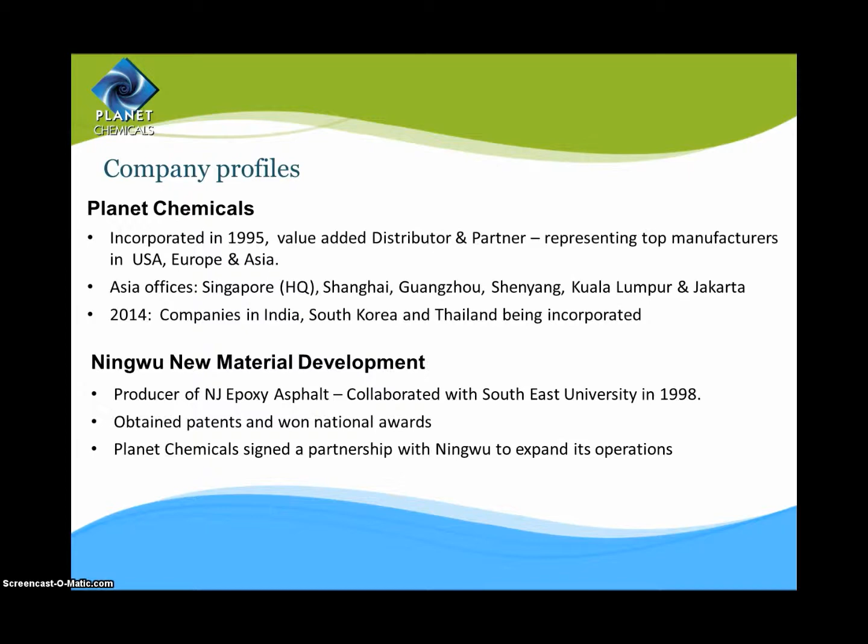Let me now give you a brief overview on epoxy asphalt. It was first developed by Shell Oil Company in the 1950s, during a time of rapid growth in both military and commercial aviation, which led to ever-increasing wheel loads of aircraft, posing structural problems in airfield pavement design. Moreover, with the development of jet-powered aircraft, pavements were required to have good resistance to high temperatures and the erosive effect of jet blasts, as well as resistance to spillages of jet fuel and hydraulic fluid.

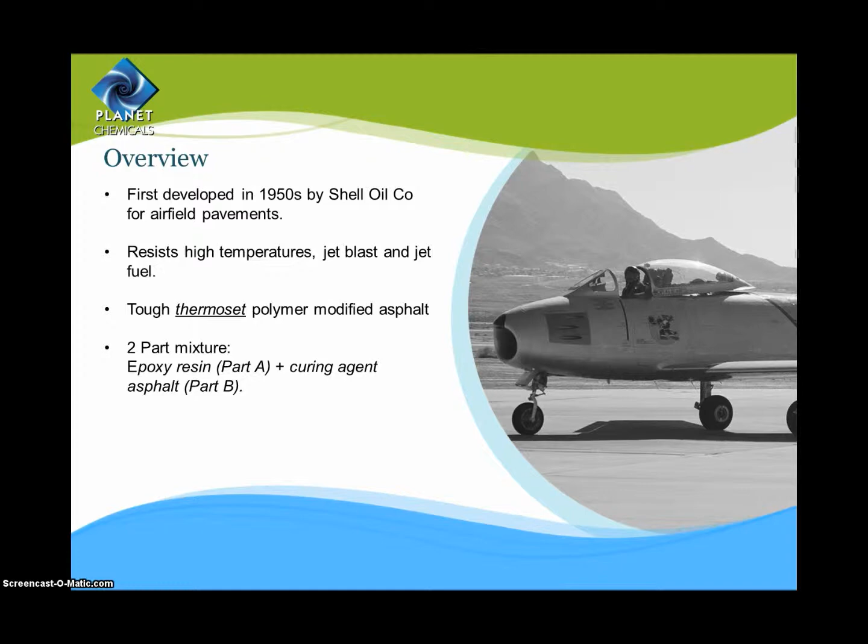So what exactly is epoxy asphalt, and what sets it apart from other pavement binders? Epoxy asphalt is a tough thermoset modified asphalt formed by combining two components: the epoxy resin and the curing agent asphalt. For those not familiar with the terms thermoset and thermoplastic, I will briefly touch on some key distinctions later in this presentation.

Epoxy asphalt comes in a set with two types: the epoxy asphalt bond coat and the epoxy asphalt concrete. A hot spray application of the bond coat precedes the laying of epoxy asphalt concrete to offer optimum bonding strength. At present, there are only two main producers of epoxy asphalt globally: Chemco Systems in the US and Ningwu New Materials, our partner in China.

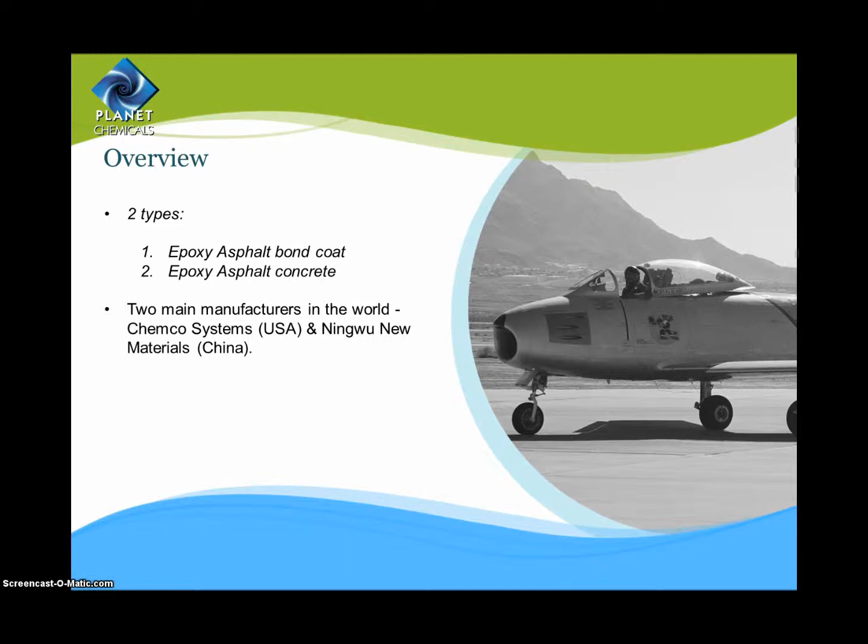In this segment, I will go through some projects that have used epoxy asphalt. This slide lists some of the prominent projects using epoxy asphalt from Chemco Systems. As you may notice, they have been rather active in the US. One of the most prominent projects using their epoxy asphalt is the Golden Gate Bridge.

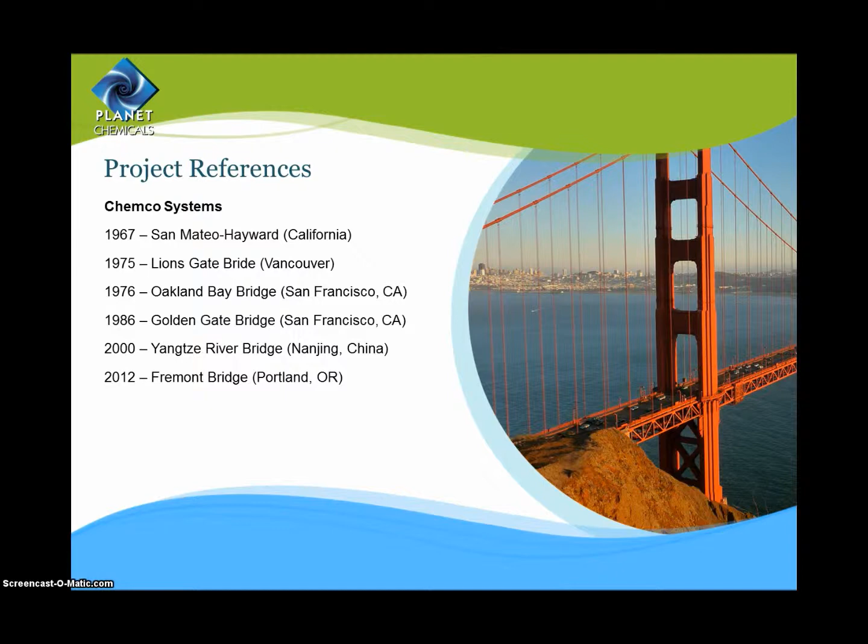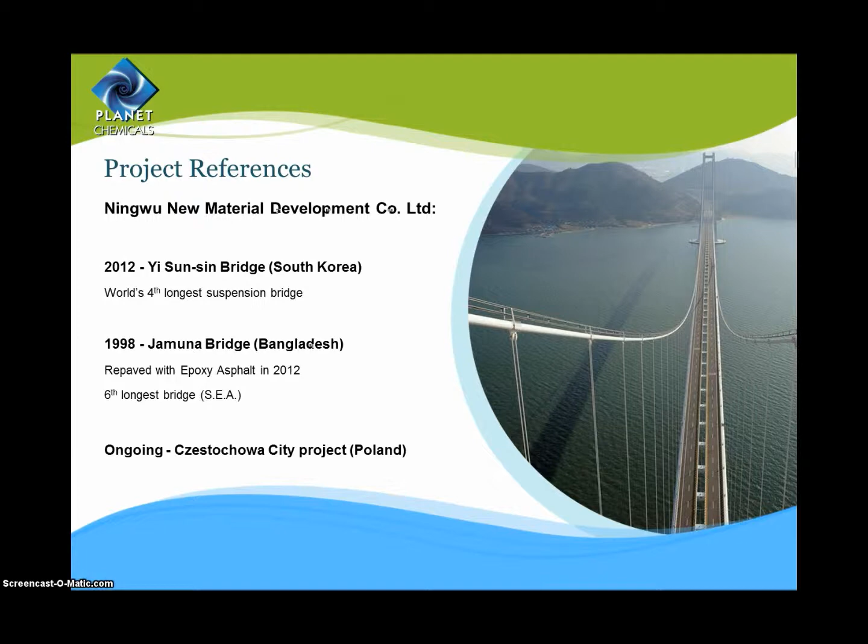One other notable project is the Hangzhou Bay Bridge, a highway bridge spanning 36 kilometers. There are also various projects outside China using NJ epoxy asphalt, including the Yi Sun-sin Bridge in South Korea, shown here on the right, completed in 2012 as the world's fourth longest suspension bridge. The Jamuna Bridge in Bangladesh was originally built in 1998 but resurfaced using NJ epoxy asphalt in 2012. NJ epoxy asphalt is also currently being used in an ongoing city project in Poland.

Now, before I go into the features and benefits of epoxy asphalt, I think it's important to first have a better understanding of the different types of asphalt modifiers.

Modifiers such as EVA, EMA, SBS, and SBR are the most common types of asphalt modifiers used today, and they are classified as thermoplastics. Epoxy asphalt, on the other hand, belongs to a category on its own known as thermosets.

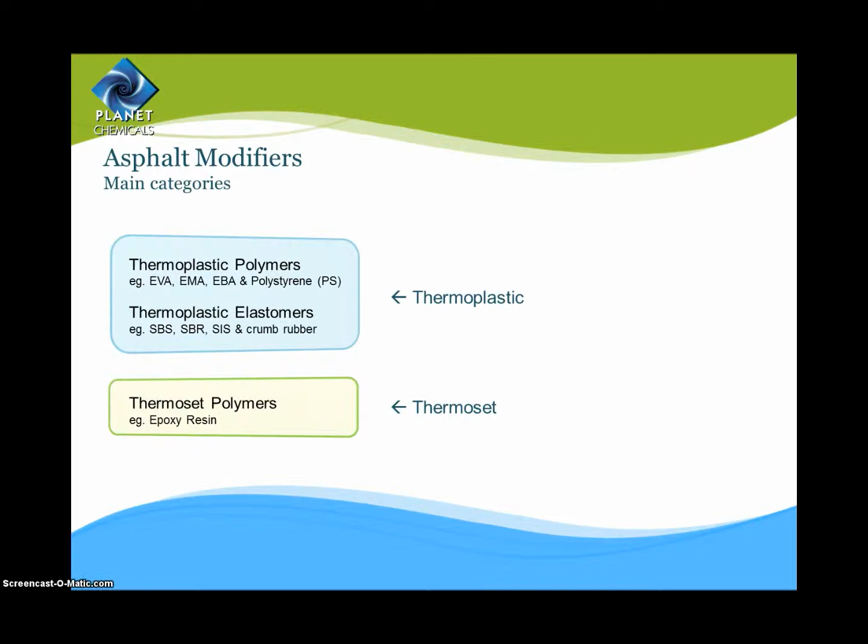So, what essentially are thermoplastics and thermosets? Simply put, thermoplastics have a reversible solidification process in that they soften when heated and solidify when cooled, much like a bar of chocolate.

Due to its reversible solidification properties, thermoplastic modifiers are most commonly used today as they are relatively easy to work with.

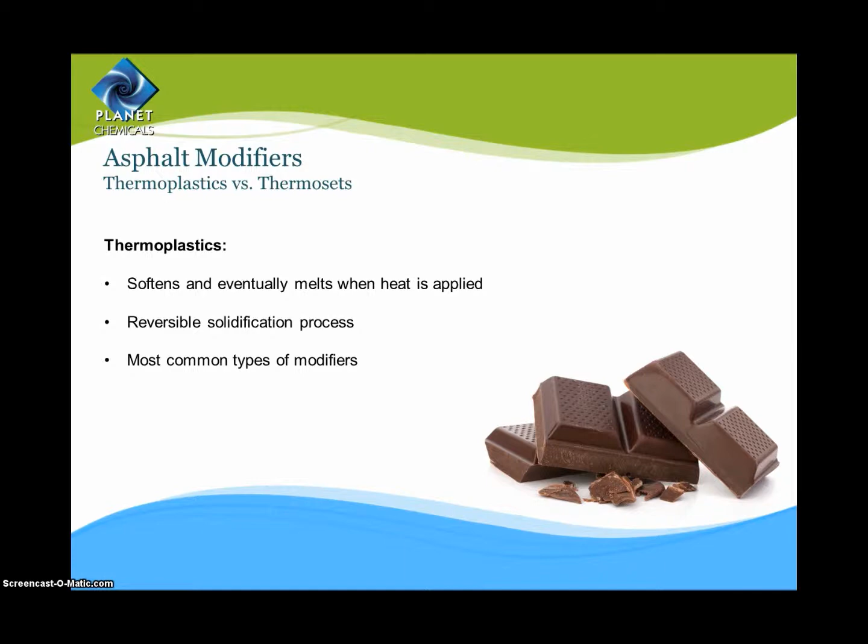Thermosets, on the other hand, can be compared to a boiled egg in that they have an irreversible solidification process. As soon as the cross-linking of a thermoset has taken place, there is no turning back. They become almost indestructible once they cure and cannot be remelted.

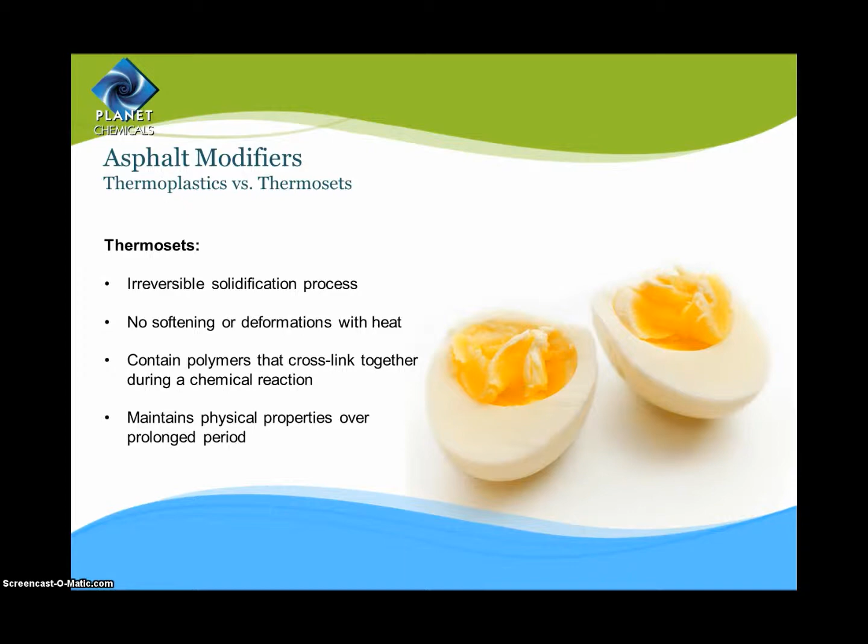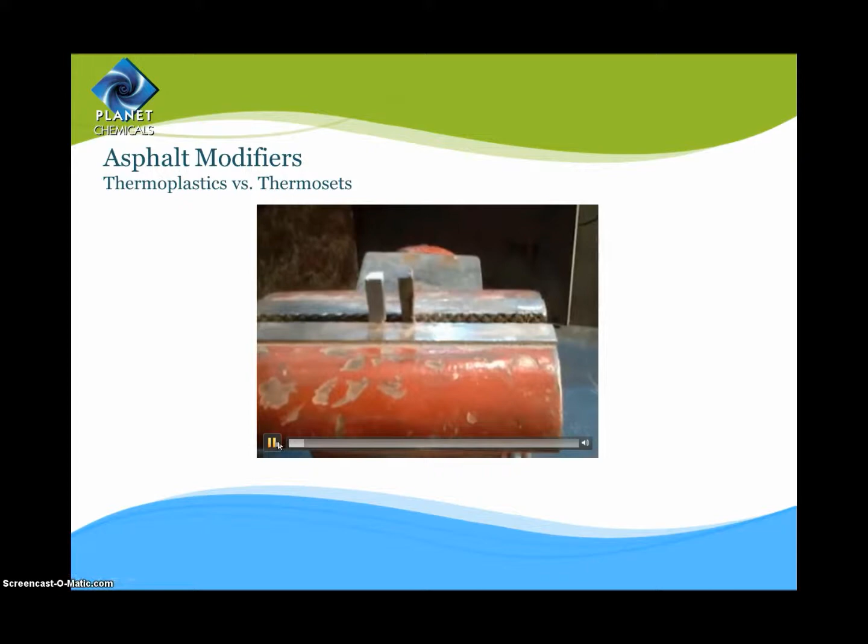This video illustrates how differently thermoplastics and thermosets react when extreme heat is applied. The specimen on the left is a thermoset, whereas the one on the right is a thermoplastic. As you will observe, the thermoplastic specimen starts to soften and deform almost instantly, whereas the thermoset specimen remains unchanged.

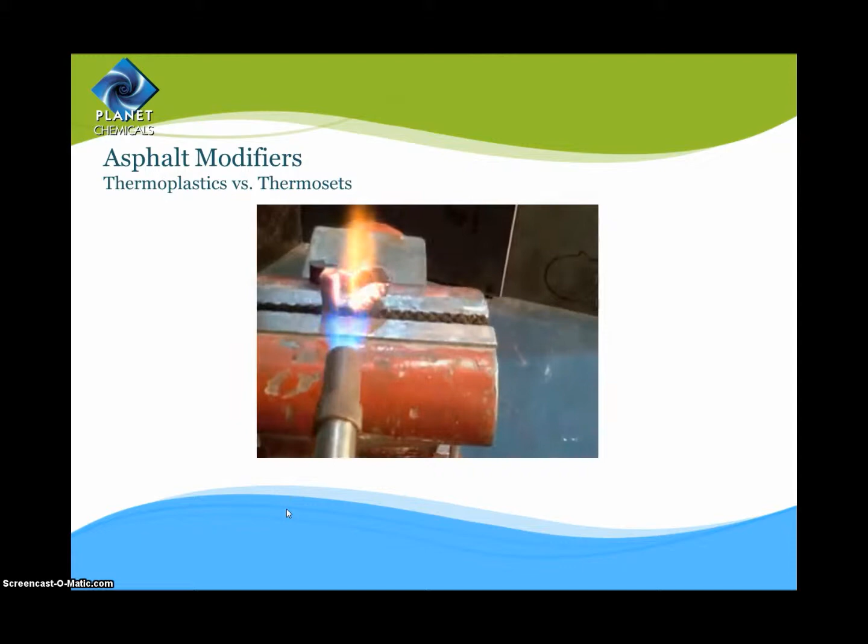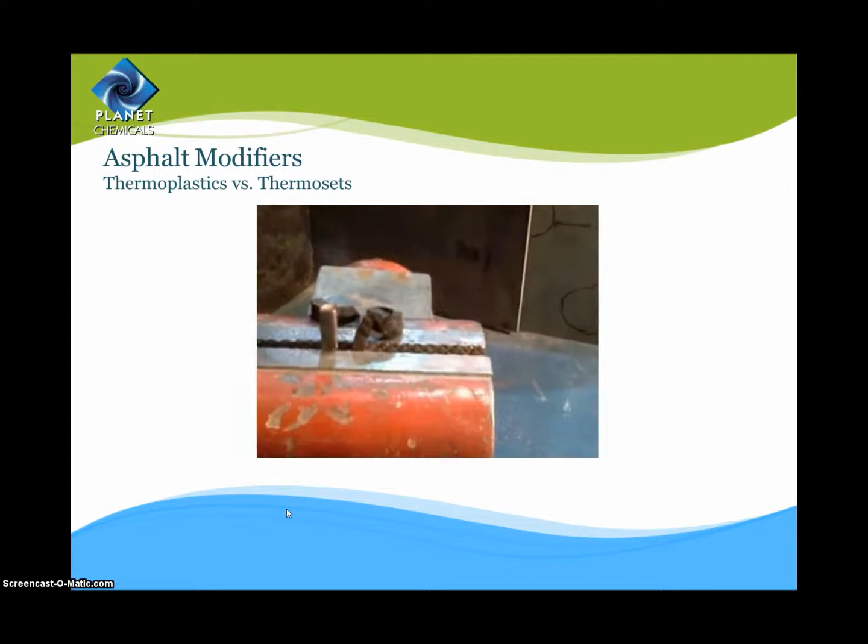Let's now move on to the features and benefits of epoxy asphalt. The thermosetting properties of epoxy asphalt offer excellent mechanical and chemical resistance. This carries significant advantages over conventional thermoplastic asphalt, where failures are prevalent at elevated load conditions, extreme temperatures, and oil spillages.

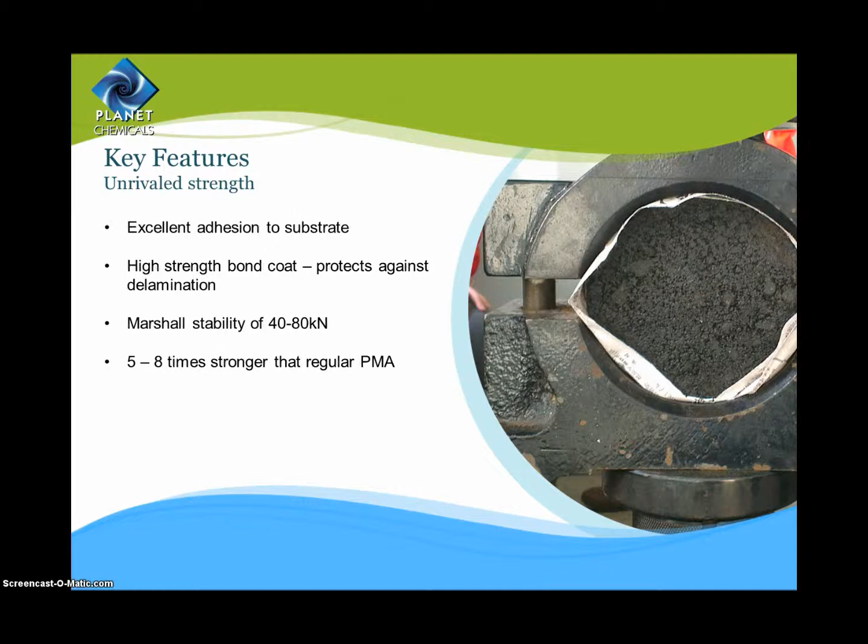Epoxy asphalt forms an excellent adhesion to the substrate and resists delamination even at higher temperatures. Featuring a Marshall stability of 40 to 80 kilonewtons, epoxy asphalt is comparatively 5 to 8 times stronger than regular PMA.

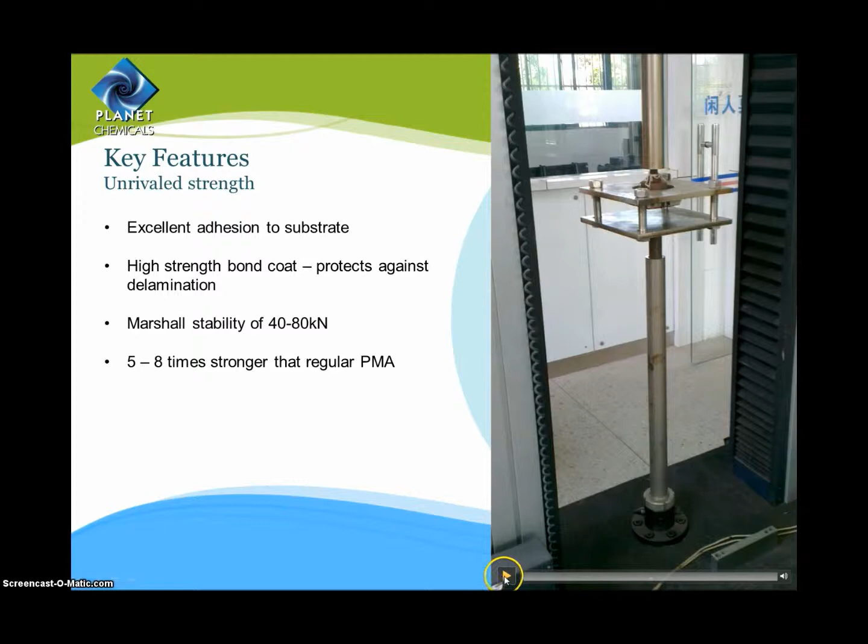The pull-off adhesion test in this video illustrates the adhesion strength of epoxy asphalt. In this test, a circular steel stamp that was glued to a concrete block with a layer of epoxy asphalt bond coat is pulled off to test the adhesion strength of the bond coat.

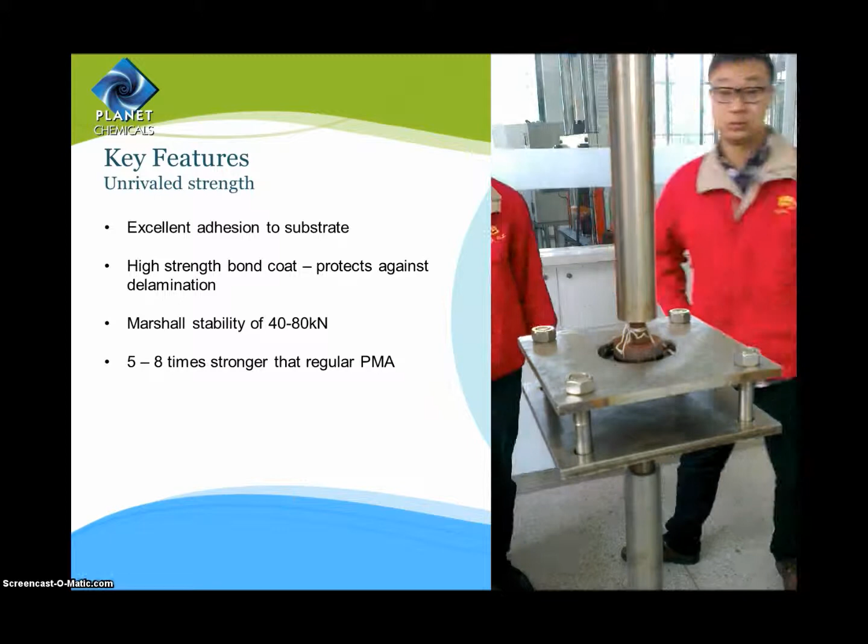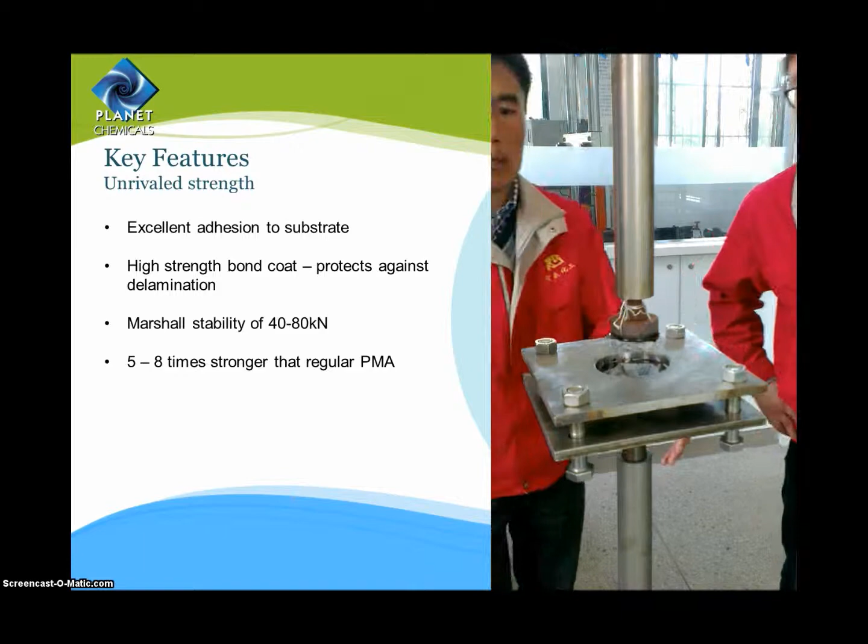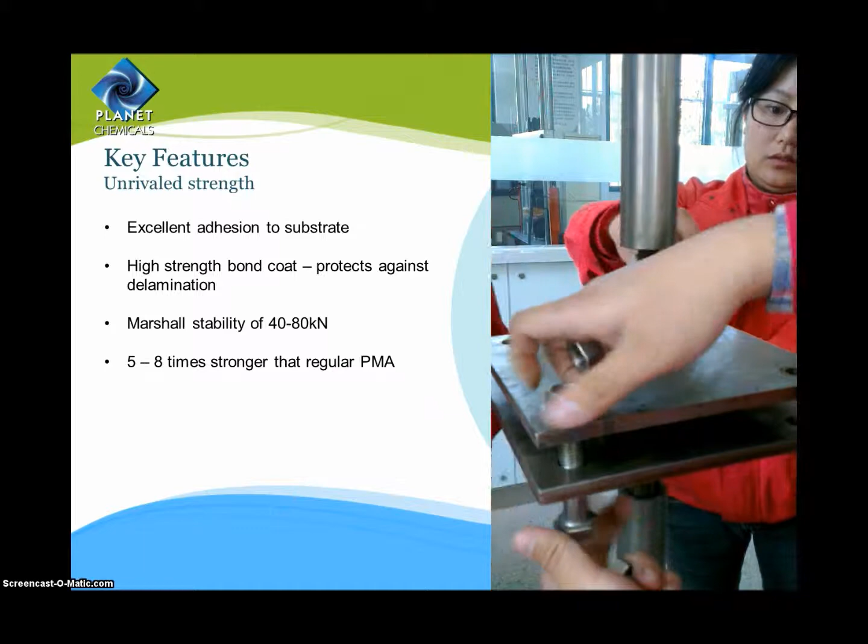As you can see, the point of separation does not occur along the adhesion surface but on the concrete block. The adhesion of the epoxy asphalt bond coat is strong enough to rip out chunks of concrete before giving way. This further substantiates that epoxy asphalt is resistant to delamination.

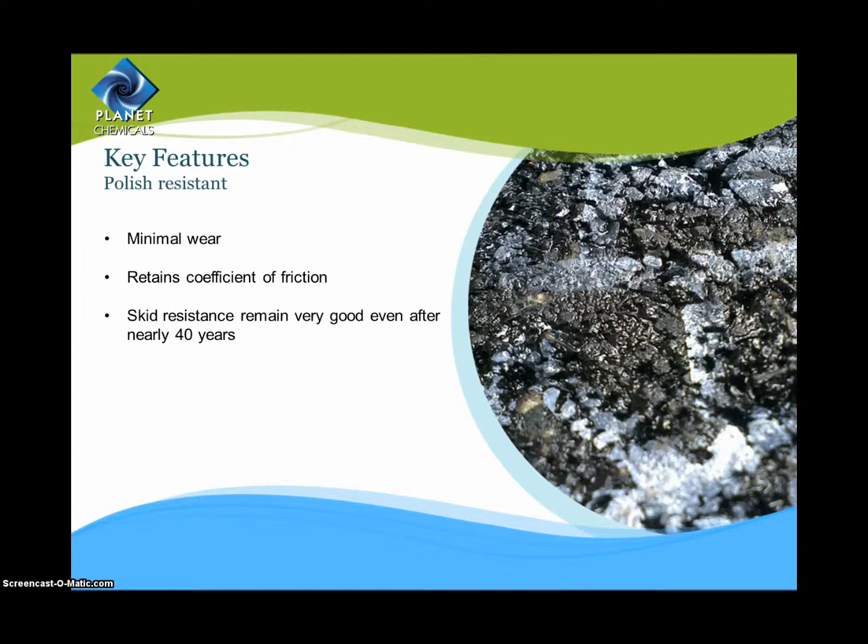As a result of its excellent structural properties, epoxy asphalt pavements are less prone to polishing. As such, the pavement effectively retains its coefficient of friction over a significantly longer time.

Next, with a Young's modulus of 80 megapascals and elongation at break exceeding 180%, epoxy asphalt features a fatigue resistance of 10 to even 30 times that of conventional asphalt.

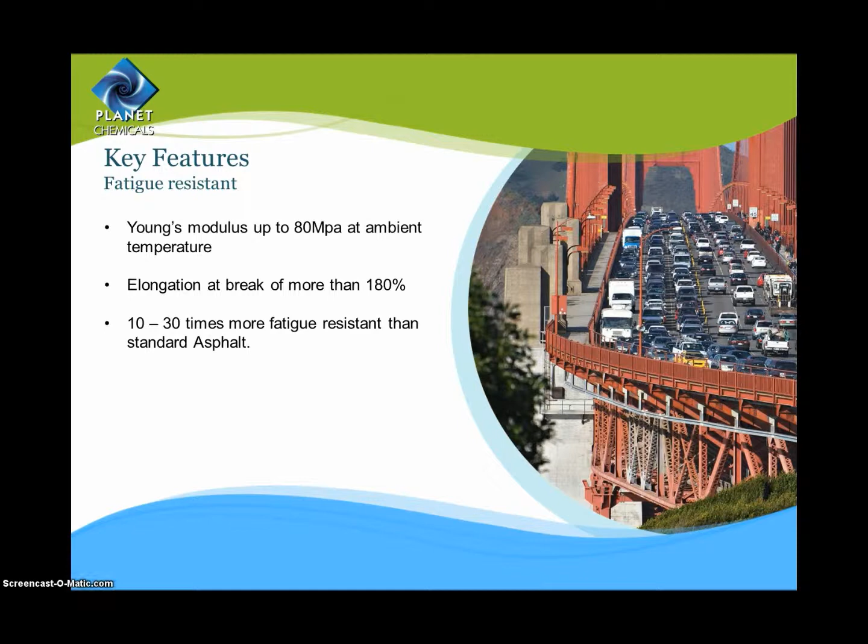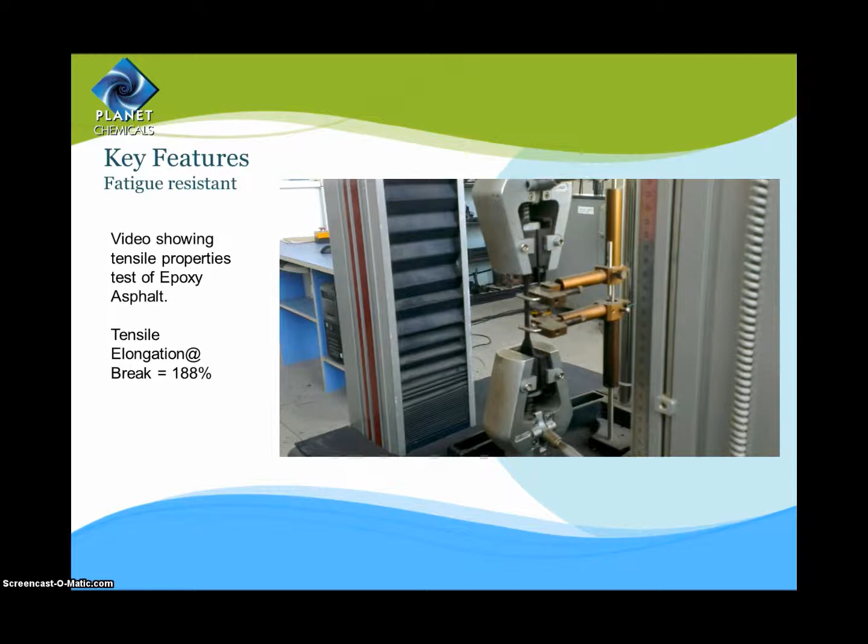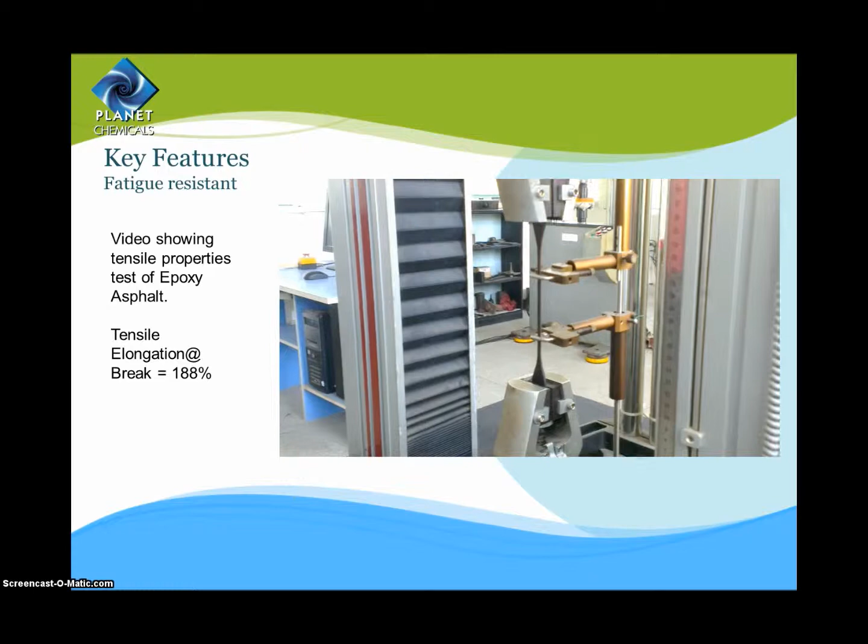The following video illustrates the tensile properties of epoxy asphalt. As shown here in the test data, the resulting elongation at break is measured at 188%.

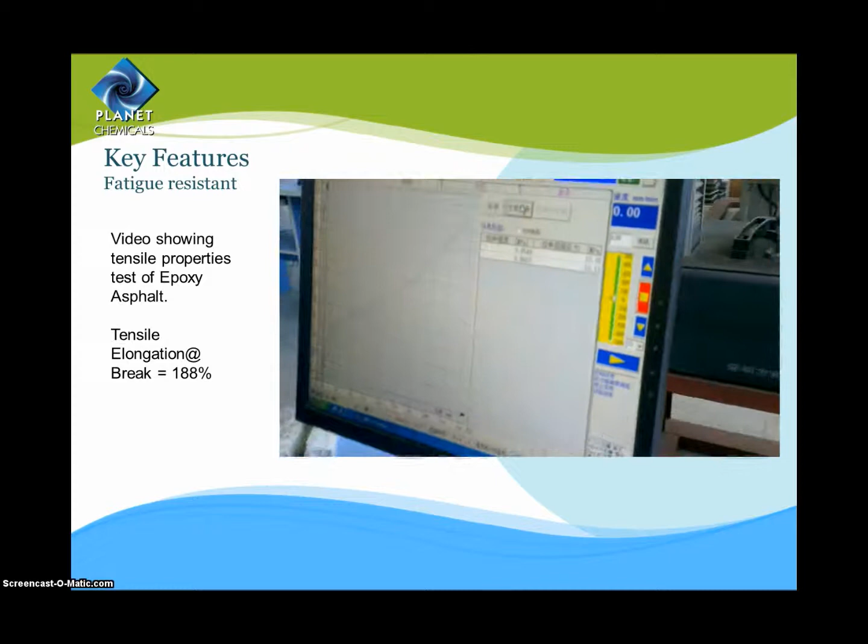This means that the epoxy asphalt specimen can stretch to as long as 1.88 times its original length before giving way.

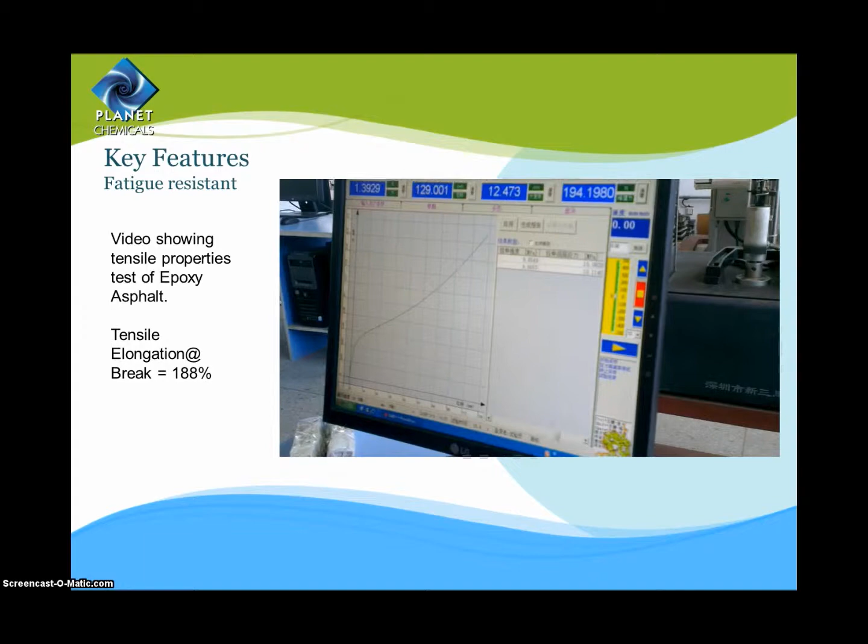Epoxy asphalt resists common failures such as rutting, shoving, and delamination, and has a maintenance-free service life of 30 up to even 40 years. That is more than double that of regular asphalt pavements.

Another key feature that places epoxy asphalt as one of the top binder options for durable pavements is its resistance to chemicals.

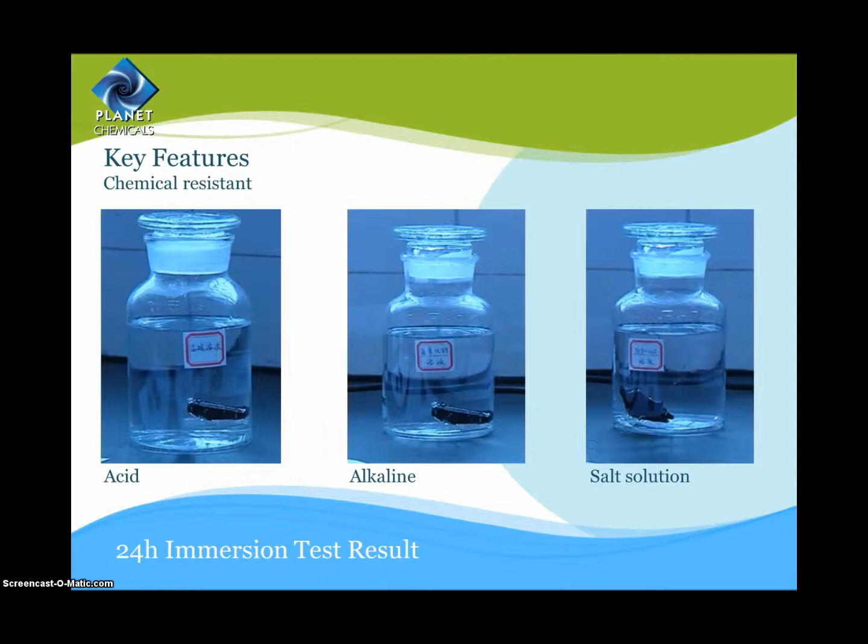Immersion tests were carried out in various solutions: acid, alkaline, salt, and diesel. These tests revealed that even after being immersed for a period of 24 hours, there were no changes to the physical and mechanical properties of the test specimen.

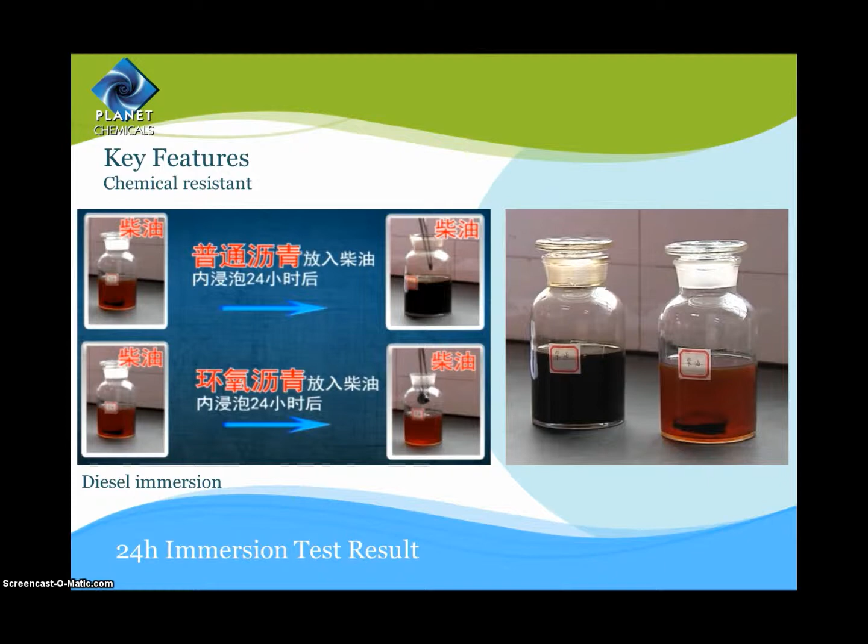It was also noted that even after a 24-hour immersion in diesel, the aggregates from the specimen did not show any signs of loosening. This clearly shows that epoxy asphalt pavements can meet the standard of oil corrosion resistance.

Now that we have gone through some of the key features of epoxy asphalt that clearly show how it contributes toward a pavement's durability, I will now go through a few aspects of epoxy asphalt that show how it can be instrumental to a reduction in total construction costs and serve as a greener, safer pavement option.

First, due to the outstanding structural properties of epoxy asphalt, mechanical stability requirements of a given pavement can be achieved with less construction material.

Studies have shown that strength requirements of a 9 to 11 cm thick conventional asphalt pavement can be achieved with only a 3 to 6 cm epoxy asphalt pavement.

This reduction in pavement material will not only serve to significantly reduce overall construction costs, but also minimize the carbon footprint of projects due to the lesser strain it has on the Earth's natural resources.

Moreover, dead weight can also be brought to a minimum. This is especially advantageous when considering bridge projects.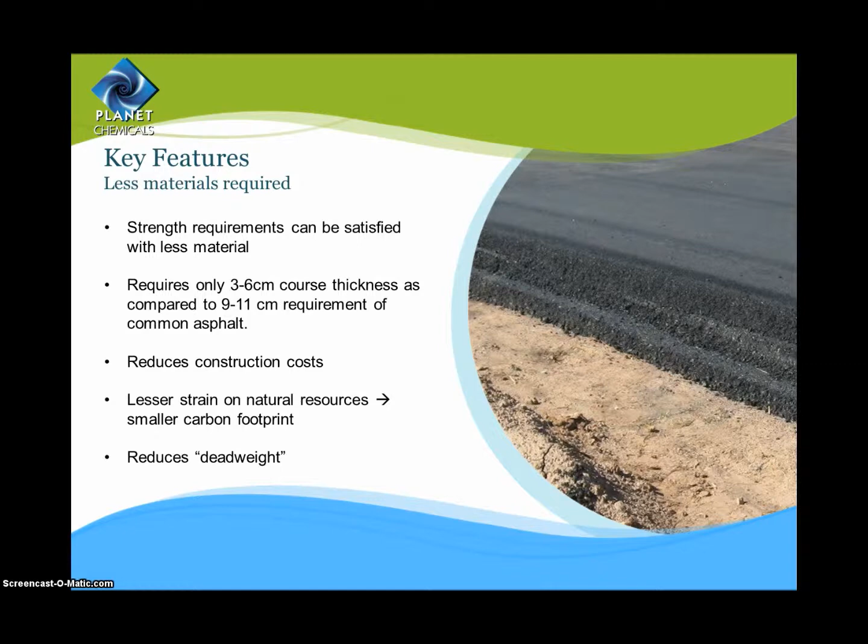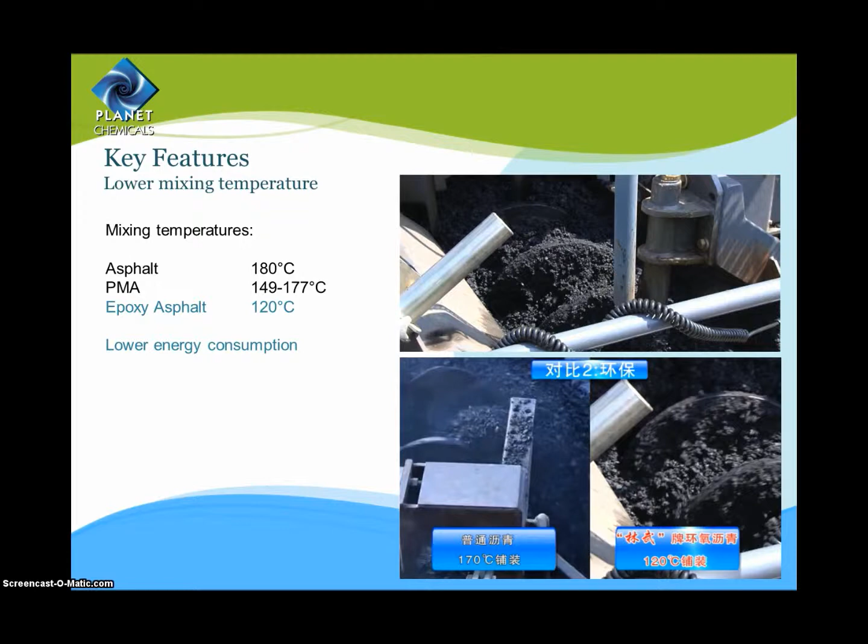Because epoxy asphalt can be mixed at a significantly lower mixing temperature compared to conventional PMA or neat asphalt, the resulting reduction in energy consumption for heating translates to an overall reduction in construction costs. Furthermore, due to the lower mixing temperatures of epoxy asphalt, no harmful VOCs are emitted throughout the construction process.

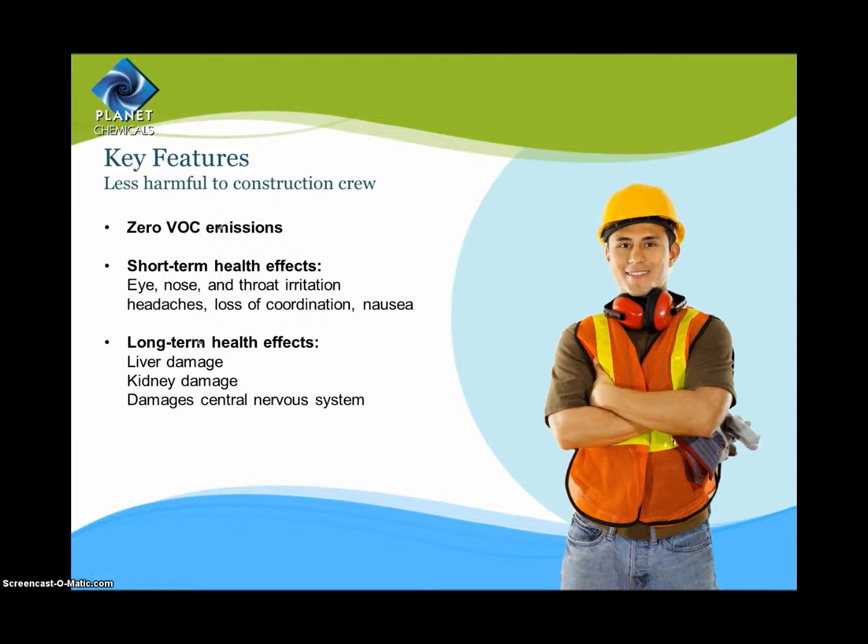Having gone through the features of epoxy asphalt, let's look at some of its associated benefits. The most prominent benefit is a substantial reduction in both initial costs and project life cycle costs. The significantly longer service lifespan of epoxy asphalt pavements, with less frequent maintenance and road closures, contributes to a reduction in life cycle costs. Initial project costs are also lowered with a reduction in raw material consumption and energy consumed.

The use of epoxy asphalt also contributes to non-monetary benefits, such as improving the overall safety and health of the construction crew by providing them a safer work environment free from VOCs. Moreover, the reduced consumption of natural resources also contributes to an overall reduction in carbon footprint.

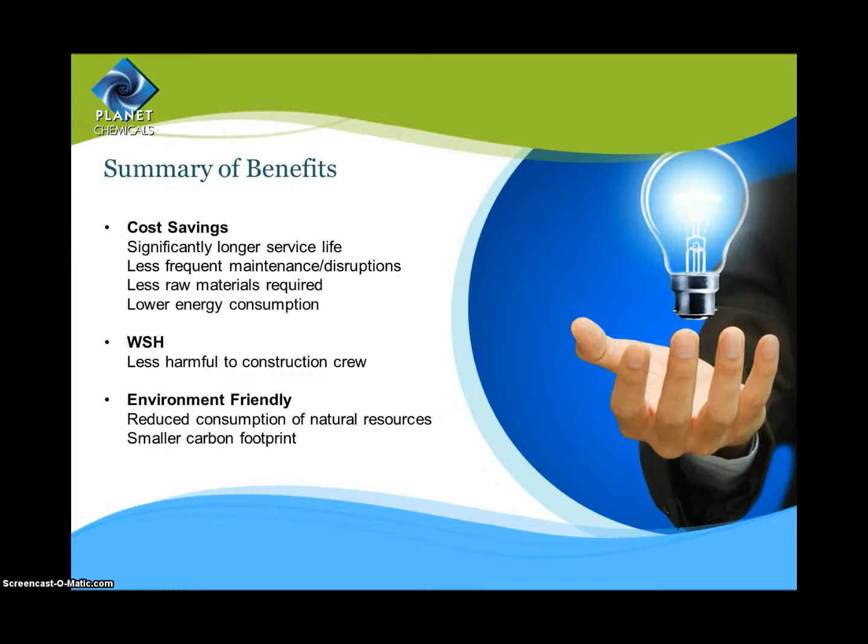To further substantiate what we have discussed so far, I'd like to quote a snippet from a report jointly put together by the OECD and the International Transport Forum, entitled 'Long Life Surfaces for Busy Roads.' This report concludes that epoxy asphalt has demonstrated its ability to deliver long service lives for pavements, attributing this to its superior qualities such as stiffness and insusceptibility to common failures.

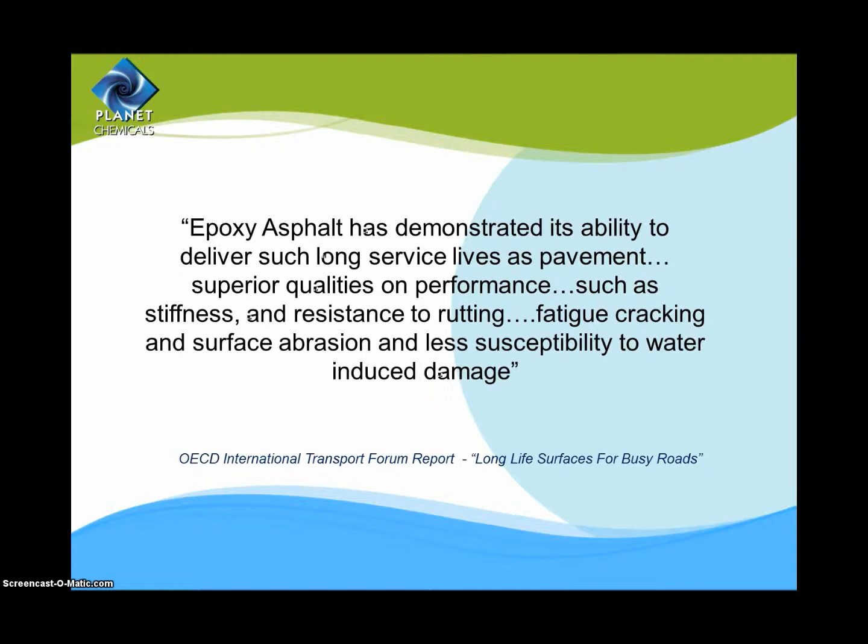Now that we have gone through the features and benefits of epoxy asphalt, I will explain how epoxy asphalt can be used in conventional batching plants with very minimal modification. In this segment, I will also touch on the additional equipment we offer to help streamline the transition of using epoxy asphalt in your batching plant.

The two parts, A and B, are stored in individual storage tanks, where they are each heated to 120 degrees Celsius and pumped into the high-speed epoxy asphalt mixer, where they are mixed according to the specified ratios whilst maintaining their temperature.

The mixture is then pumped into the batch plant mixer, where the epoxy asphalt blend is mixed together with preheated aggregates and loaded onto haul trucks that transport the pavement mix to the construction site. It's important to note that the travelling time of the asphalt mix must not exceed 1 hour, due to its pot life. I will further discuss the issue of pot life in the next segment of this presentation.

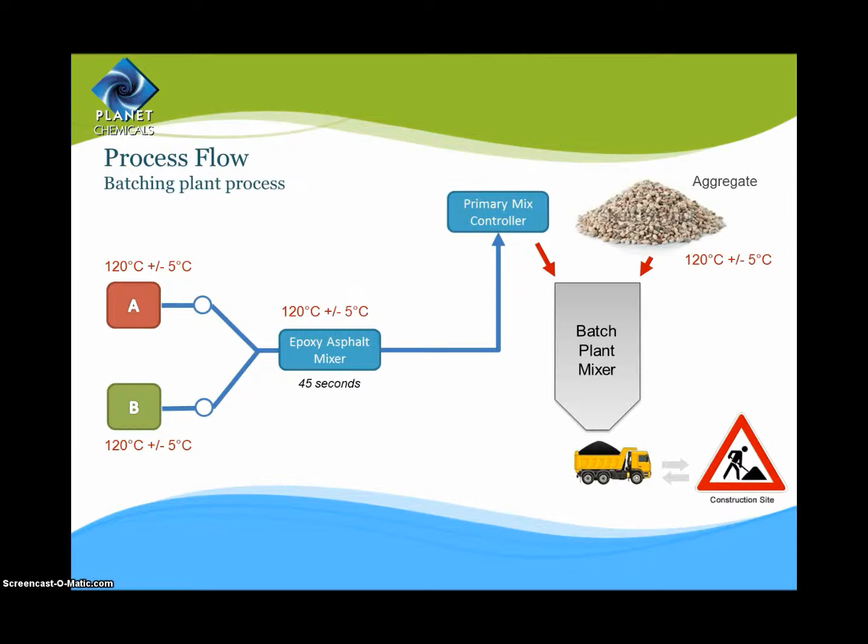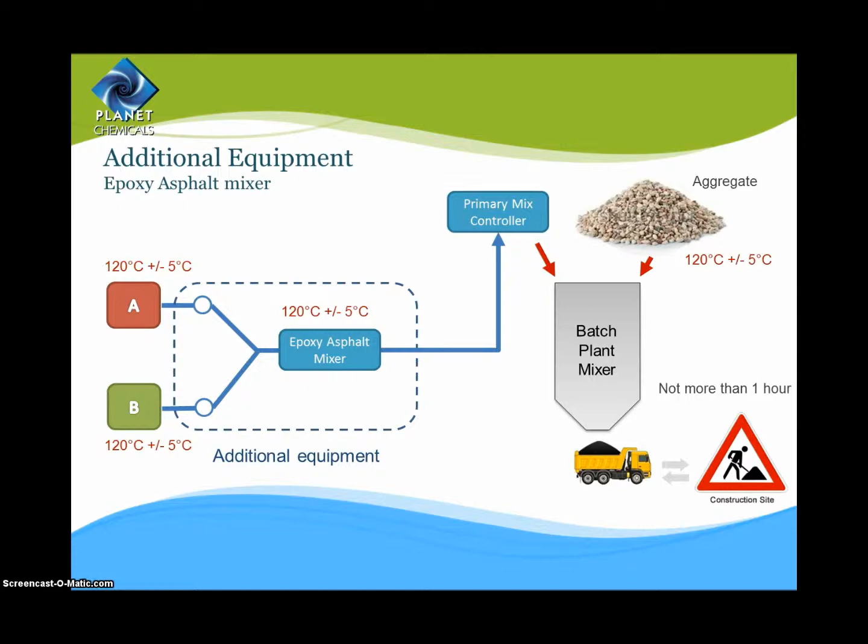There are two main types of equipment that we provide: the high-speed epoxy asphalt mixer and the bond coat spray applicator. The high-speed epoxy asphalt mixer controls the flow of part A and B according to their specific mixing ratios, while ensuring a homogeneous mixture is pumped into the batch plant mixer. The bond coat spray applicator is especially important for large-scale projects as it significantly minimizes the workload, using state-of-the-art technology to ensure an even layer of bond coat is applied to the surface.

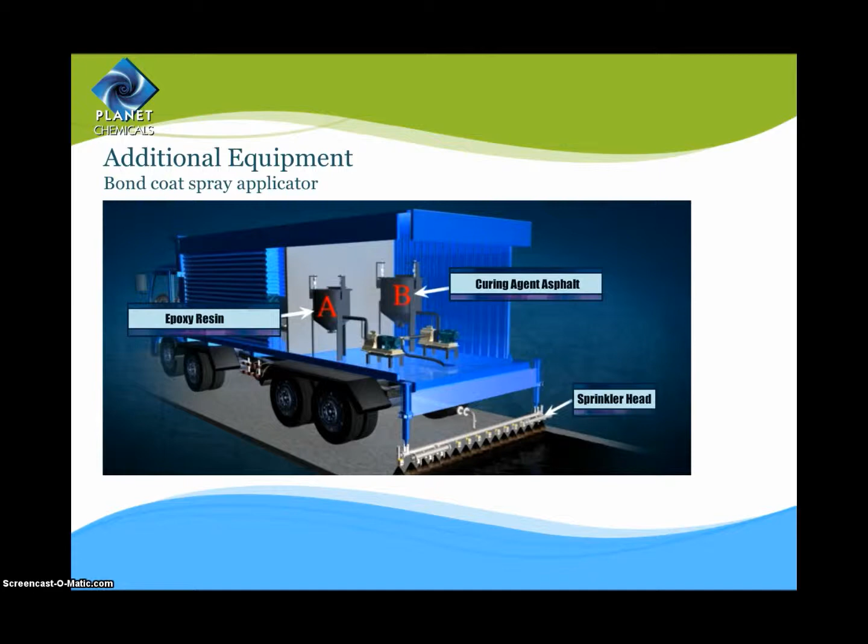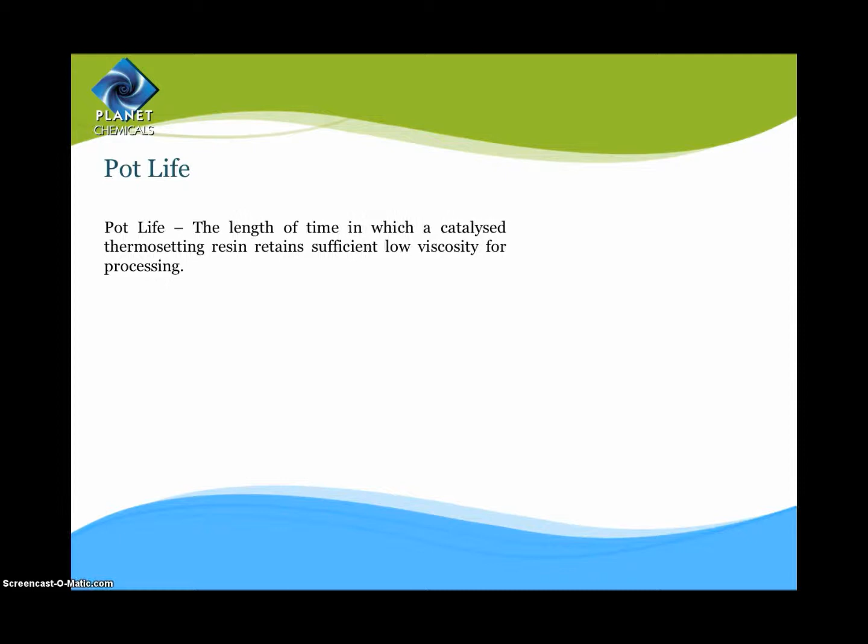Now, this brings us to the topic of pot life. The pot life is defined as the length of time in which a thermosetting resin retains sufficiently low viscosity for processing. As such, the pot life is a very important factor to note, as it essentially lays out the allowable time window allocated for blending, transportation, laying, and compacting of the epoxy asphalt pavement.

The three grades of HLJ epoxy asphalt we offer have different pot lives. HLJ-2910 has an extended pot life of 120 minutes, whereas the other two grades, HLJ-5210 and 8810, have pot lives of 90 minutes. The table shown here entails the pot life and recommended time schedule for each grade. What can be noted here is the difference in time allocated for transportation.

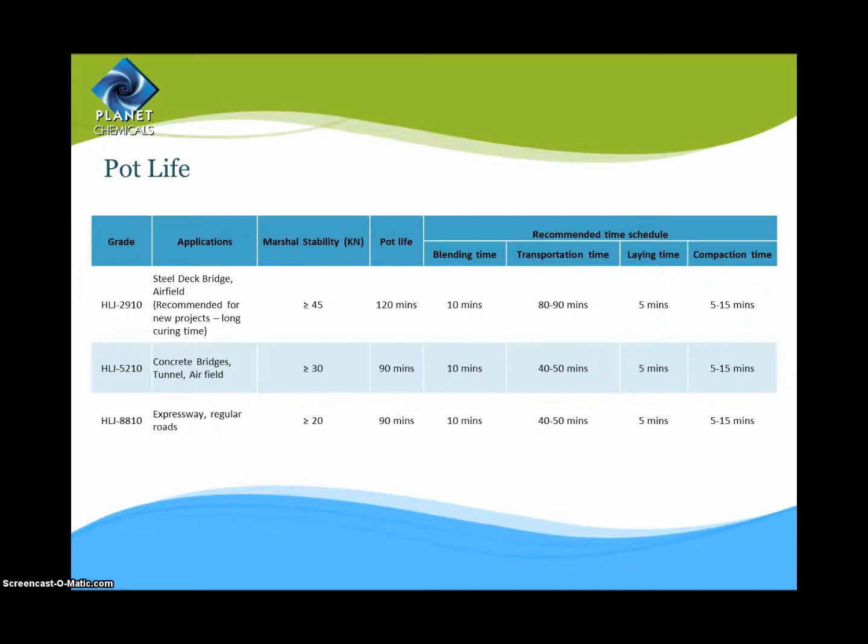Before we wrap up this presentation, I think it would be fair for me to also address some common setbacks of epoxy asphalt. First, due to its pot life, stringent time management and temperature control are essential for its use. This means batching plants cannot be situated further than 40 to 50 minutes from the construction site. A portable batching plant should be used for construction sites that are located more remotely.

While some may argue that working with epoxy asphalt may be overly complicated, more than 35 projects were successfully completed over the last 10 years. If they can do it successfully, so can you. To help you get started, we will also be happy to provide on-site technical assistance during the initial phase.

And yes, although epoxy asphalt costs more than regular grades of asphalt on a per unit basis, this cost difference is dwarfed by the benefits and savings enjoyed when you consider the life cycle cost of the project.